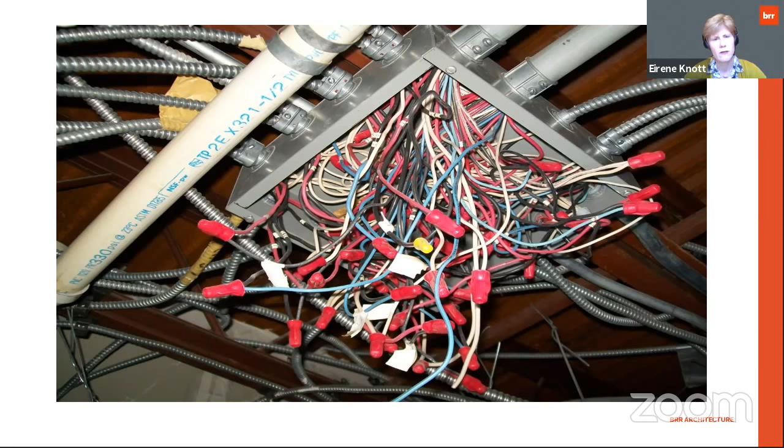So what is a code? It's a body of laws and it's constantly evolving. It's a living document. Since it's a body of laws, it has to be adopted. So a local jurisdiction or a state can adopt the code in order for it to be enforced. It contains the word shall, which means these are things that you have to comply with.

And it is revised every 3 years. As I said, it's constantly evolving. It is a living document. And they try to keep up with construction technologies as well as new materials that may be available. And then it gets updated as incidents occur throughout the code development, such as 9/11. And I'll talk about a few others here in a minute.

And the first one, why do I have to meet code? This is a fire that took place in the Beverly Hills Supper Club in Southgate, Kentucky. It took place on May 28, 1977. It was the deadliest fire in U.S. history since 1944 and the third deadliest nightclub fire in U.S. history. Over 200 people were injured, 165 people were killed, and most of the people that were killed were in rooms that were not intended to handle the occupant load that was in there. So the rooms in which most lives were lost were double the occupant load it could safely accommodate.

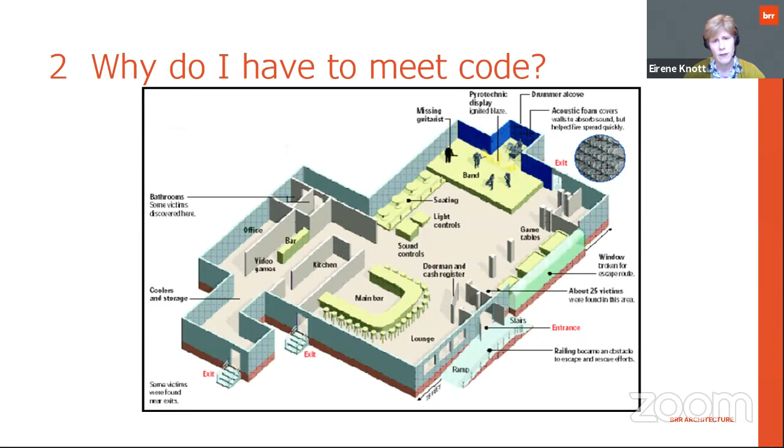So the screen in front of you now represents a study that was done by the National Institute of Standards and Technology, which is regulated under the Department of Commerce. They work with industry to develop and apply technologies to take measurements and standards, and they also investigate fires.

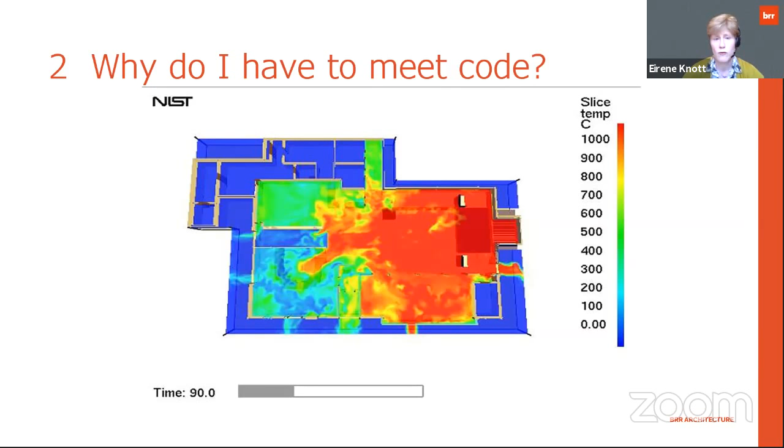So this is the floor plan of the restaurant, the nightclub. And what you see in front of you is the temperature. So on the right-hand side of the screen is a scale. At the very top of the scale is 1,000 degrees centigrade. So that's a pretty hot fire. So as you can see in the picture, close to 50% of that building had a temperature of over 1,000 degrees within 90 seconds of that fire starting.

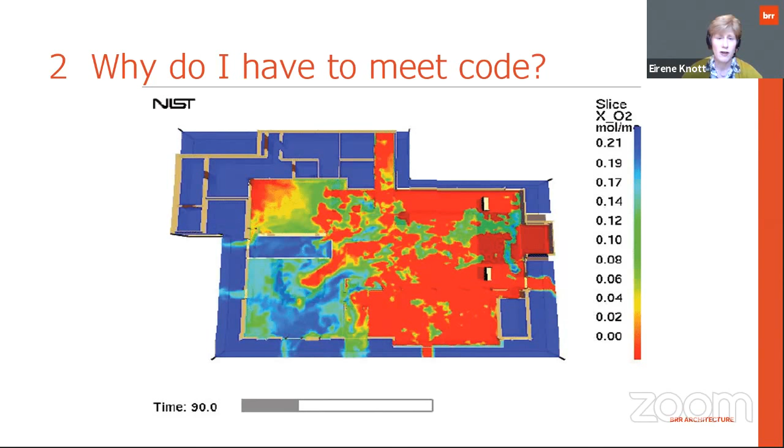This illustrates the amount of oxygen. So as you can see at the very bottom of the screen, the red indicates 0% oxygen. So this was taken at 5 feet above the floor after 90 seconds. So 50% of that building, or pretty close to that, had no oxygen at 5 feet above the floor after 90 seconds of that fire starting.

This last image represents what the conditions would be if the building had had a sprinkler system in it. And as you can see in this very tiny area right here, that's where the fire started. And that's where the most heat would have been. And with a sprinkler system installed, the fire would have been self-contained.

So why is this important? The reason this took place is plan review didn't happen in this case, because under the building code at the time, even though it went from a restaurant to a nightclub, there was no plan review required. So this new facility moved into this existing building and made some changes that didn't necessarily require a building permit. So as a result, things happen, and now the codes have changed.

So now you can't have foam plastic in a situation like this, or if you do provide them, there are limited applications as to where they can be applied. They also changed the sprinkler requirements. We talked about the Beverly Hills Supper Club changing the occupant load to 300 requiring sprinklers. Now we've changed the occupant load for a nightclub down to 100 people or more.

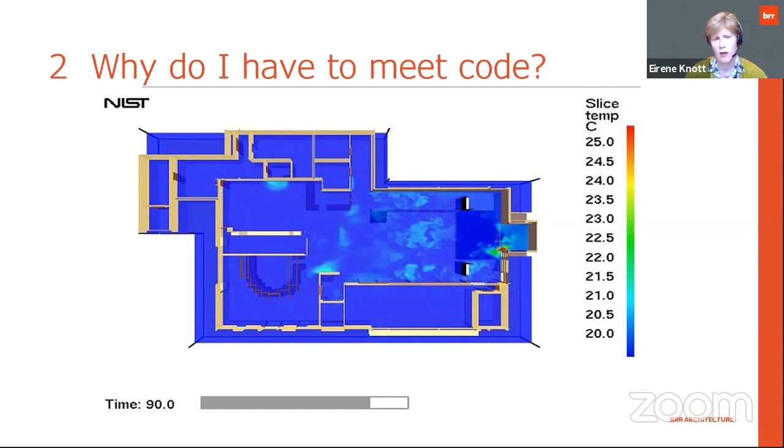Not only do we have to meet the code to provide for people who occupy the building to get out in an emergency, we also have to provide requirements for those who come into the building to help get people out. In this case, this is a hotel fire in Houston, Texas, that took place on May 31st, 2013. More than 150 firefighters fought the blaze. It took them more than 2 hours to get the fire under control. As a result, 4 firefighters died and 13 were injured.

And to this day, they still do not have a determination of the cause of the fire. So here's an example of where not only are we designing buildings to make it safe for people who are in them, but we're trying to make it safe for people who have to show up and help people get out in an emergency.

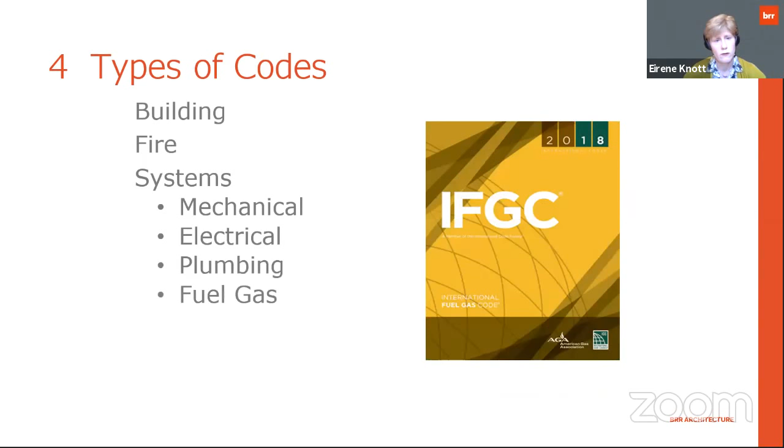Then we get into systems. So we have mechanical codes, we have electrical codes, we have plumbing codes, fuel gas codes. Then we get into energy and accessibility. So what you see on the screen is the ICC A117.1. This is the accessibility standard that is referenced by the building code. So it works in conjunction with the building code on how to make your buildings accessible. So the building code tells you what needs to be accessible. The A117.1 tells you how to make it accessible.

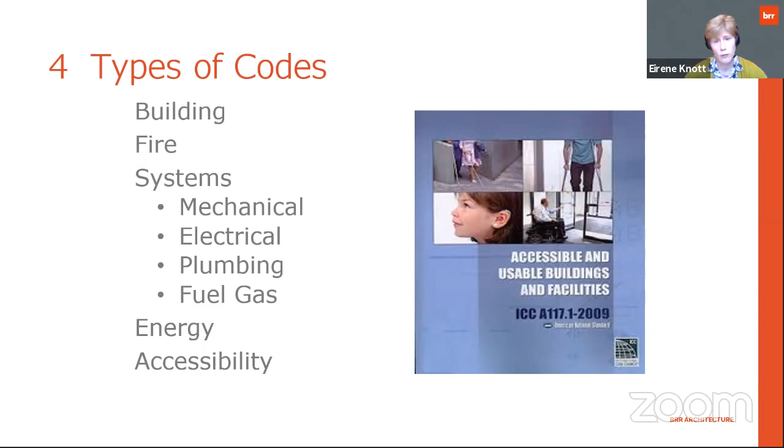We also have to comply with federal regulations. So we have to comply with the 2010 ADA standards. And then last but not least, we have sustainability. So as more jurisdictions start adopting sustainability codes across the country, we'll be working together with them on this. The picture you see in front of you is the International Green Construction Code, which is published by the International Code Council. This particular version and all versions moving forward was developed in conjunction with ICC, ASHRAE, IES, USGBC, and AIA. They all worked together to develop one code, so we had one level of sustainability across the country.

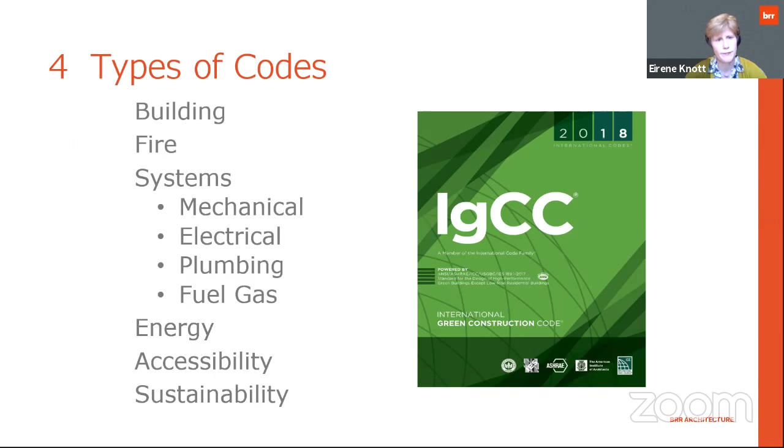So how does a code get developed? Anyone can write a code change. What happens is ICC generally has a deadline for codes to be submitted in January. So I told you earlier they're developed on a 3-year cycle. So January of 2022 is the deadline for the next code cycle process, which will cover a portion of the codes that ICC publishes. And next cycle would include the building code. So in January of 2022, if you have a code change that you want to submit, you have to get on ICC's website and submit your code change.

It gets uploaded to a database where that information is then handled by staff. And those codes then get developed into an order of how they're going to be heard, and they're heard in the order in which they're published in the building code. So you start with everything in chapter 1 and work your way through chapter 35.

So those are heard by a committee, and that committee is usually made up of 10 to 15 people that represent the industry, and they decide whether they're going to approve your code change, modify your code change, or disapprove your code change. So based on the result of that committee hearing, then there's another hearing that takes place in the fall. So it's usually September, October, and that's the public comment hearing.

At that hearing, you go up to the microphone and testify as to why you want to overturn what the committee did. Say the committee disapproved your code change. So at the public hearing, you go up to the microphone and convince everybody there who's a voting member why you want your code change approved.

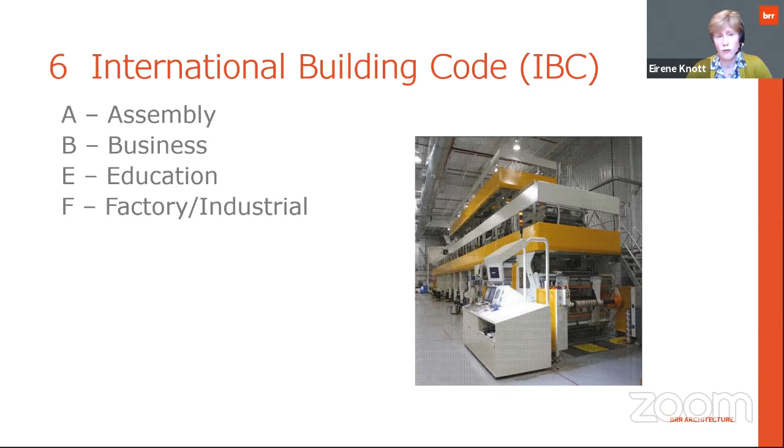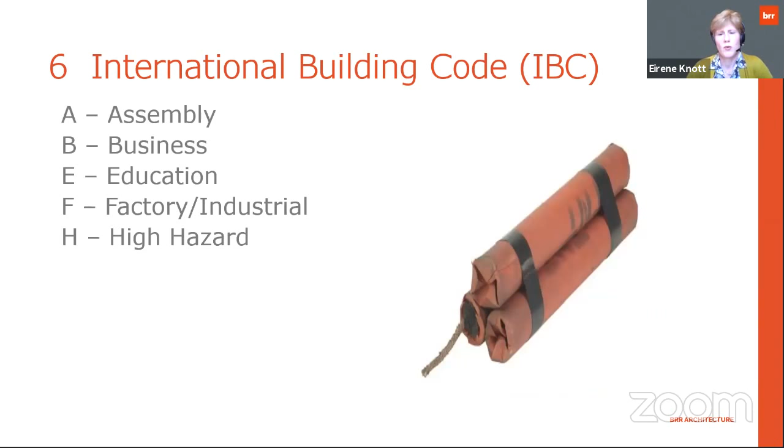Then we get into H's. So an H1 could be dynamite, and here we have Napoleon Dynamite. So an H1 is anything that has a detonation hazard, so it's going to blow up. An H2, such as flammable liquid, so gasoline would be an H2, it's considered a flammable liquid. So what happens with flammable liquids, once they catch fire, they spread and they accelerate the burning.

Then we have an H3, which is a combustible liquid, different than a flammable liquid. A combustible liquid will support combustion, where the flammable liquid will actually help accelerate the burning. Then we get into H4, which is a health hazard. So ammonia, for example, is a health hazard. And then we get into H5, which are semiconductor fabrication facilities.

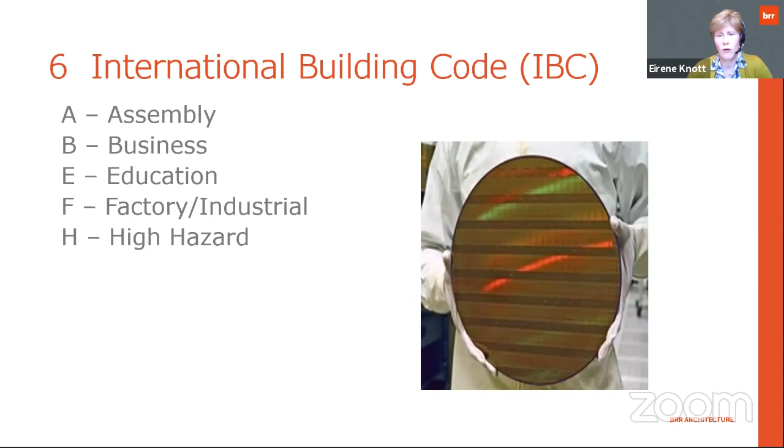Then we get into our institutional occupancies. We have an I1, which is an assisted living facility for more than 16 people. So this is people that need continual care. Then we get into an I2, and this would be a hospital or a nursing home. So these people are not capable of self-preservation in an emergency. We get into I3, so this would be somebody in a restraint or security provision, such as a jail. And then I4s are daycares, and daycares can be for any age. It could be for adult or children.

M for mercantile, and we have R for residential. So we have R1, which is transient, which would be hotels where people stay for less than 30 days. Then we get into R2s, which are primarily permanent in nature. So these would be apartments, dormitories. This could even be an extended stay hotel. So they're non-transient people. They're staying there for a longer time. They're going to be more familiar with their surroundings.

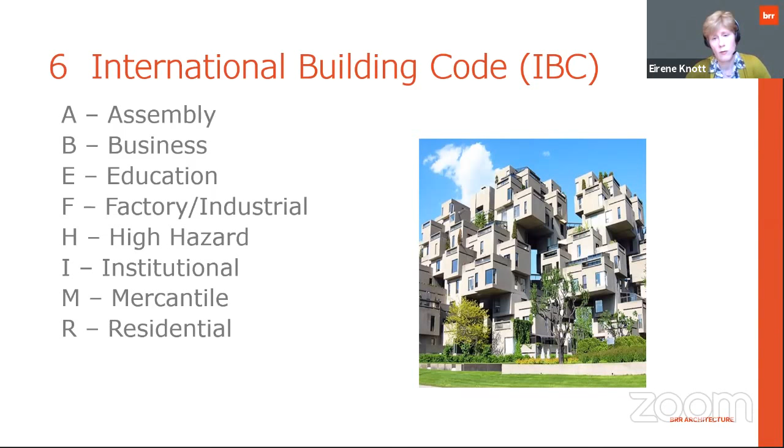Then we get into R3. So this could be a permanent care facility for less than 5 people, such as drug rehabilitation. And then we have R4, which is assisted living, which would be between 5 and 16 people. If you're more than 16 people, you'd fall under the institutional occupancy.

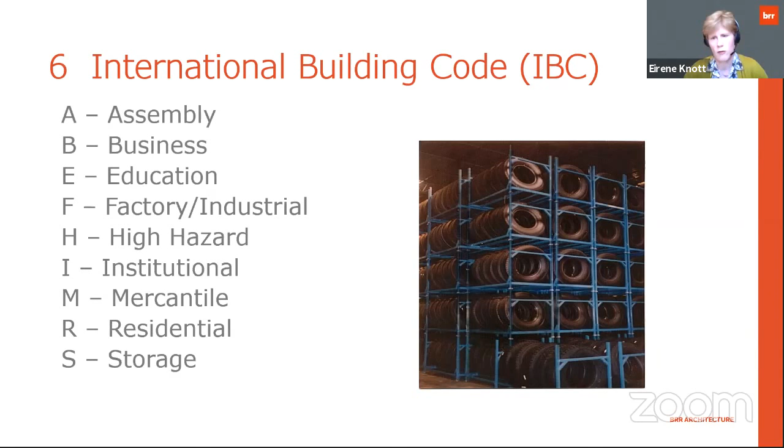Then we get into S, which is for storage. So we talked earlier about factory and industrial. So this would be perhaps the storage of those items that are made in the Fs. So again, we have S1, which is going to be a moderate hazard. So anything that's stored here is going to be somewhat flammable, such as clothing or tires. And then we have an S2 occupancy, so these are going to be lower hazards such as sheetrock.

Non-combustible means it will not support combustion. So if a fire starts, that particular material is not going to contribute to that fire and help the fire grow. We know that steel can melt in a fire, but steel does not support combustion. So steel would be a non-combustible material. And then we get into combustible construction.

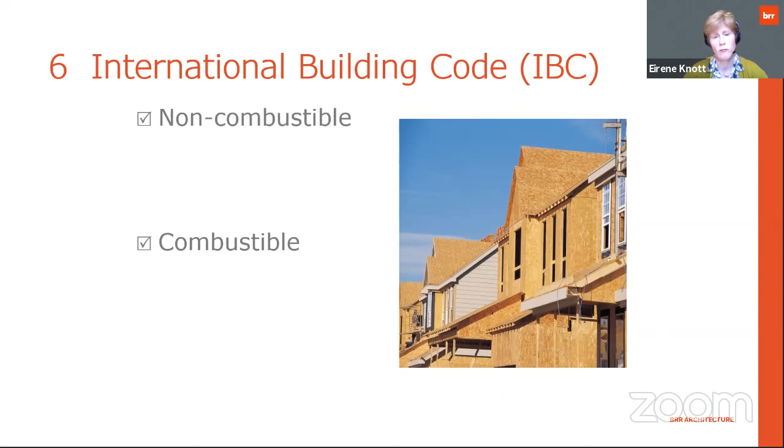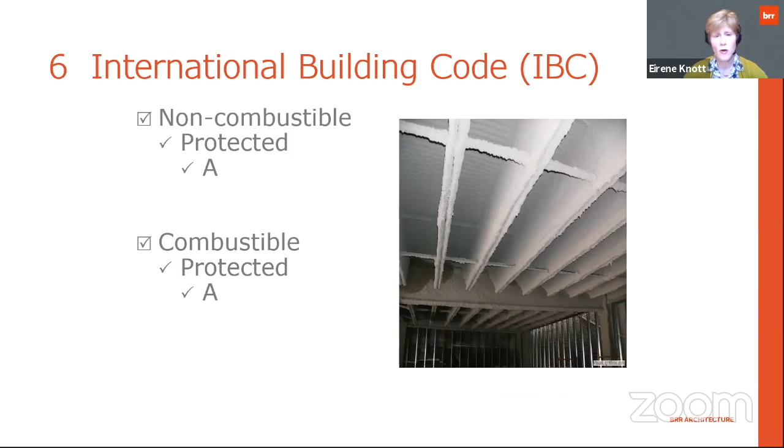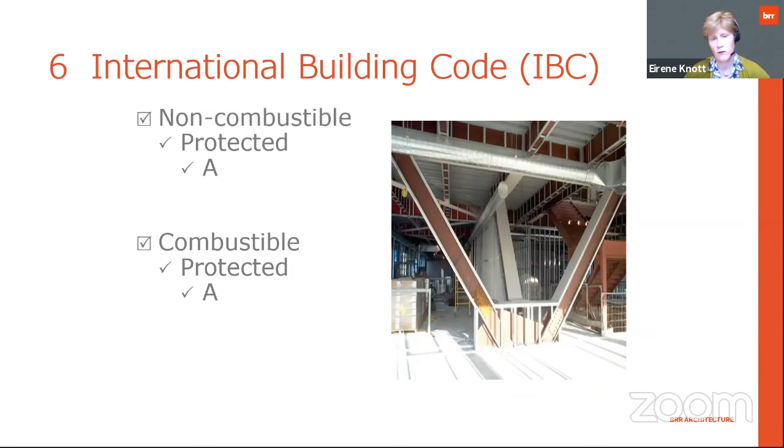So these items are going to burn and they're going to contribute to the fire and add fuel to it. So the building code wants some of the structural elements associated with the building to either be protected, which means we're going to put spray-applied fireproofing on them, or we're going to encapsulate those structural members in gypsum. So on that table, anything noted as A means it's protected, which means it has at least a 1-hour rating.

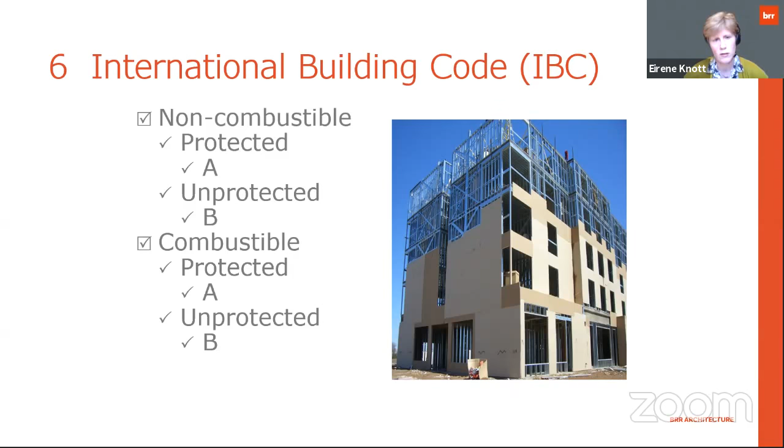So when we're building with type 1 construction, we're going to rate everything with at least a 2-hour rating. And when we're type 1A, it's going to have a 3-hour rating. So these buildings are essentially allowed to be as tall and as big as you want them as a designer, with the understanding that you've made it non-combustible and everything has at least a 2 or a 3-hour rating associated with it.